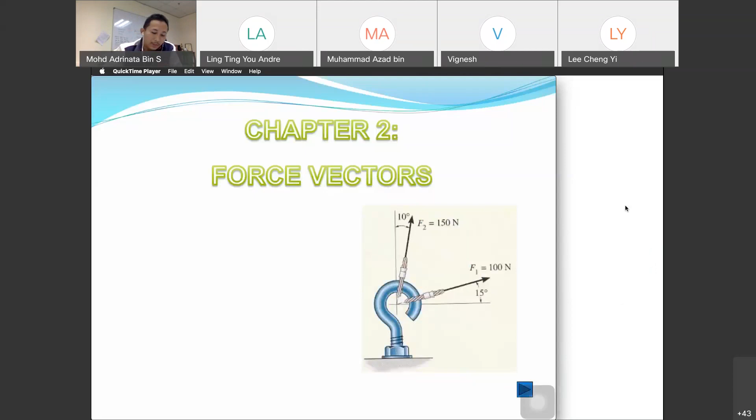Okay, so class, we have discussed our chapter 3 in our previous class. This is chapter 2. Okay, so, wrong chapter. We have discussed our chapter 3. This is chapter 3, Force System Resultants. Okay, this is about moment. So we have discussed about the moment, and it is about moments, which is force times the distance.

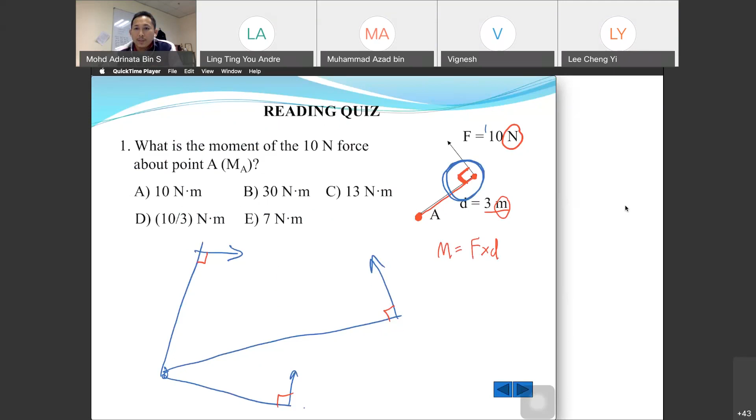Okay, so in this chapter we will learn about the couple moment, and the equivalent system of forces and moments, and also the resultant force and the couple system for force and moment. Okay, so we have learned, and I have drawn you the moment, how to determine, how to calculate your moment. It is from F, force, load given, and also the distance from the load to the point that you want to look at. The application is about the wheel and the lug nut. So it depends on the force, and also it depends on the distance.

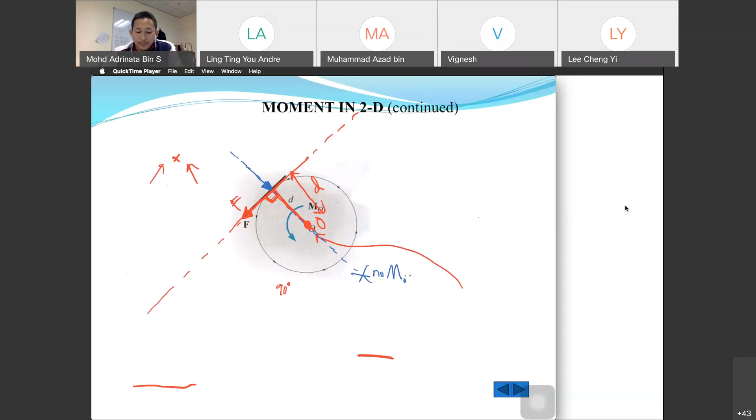Okay, so I have explained an introduction of the moment. So I hope that you have looked back if you do not understand, and I have uploaded the previous class about this one. There is the magnitude, which is perpendicular, and we have direction, and mostly we assume that counterclockwise is positive.

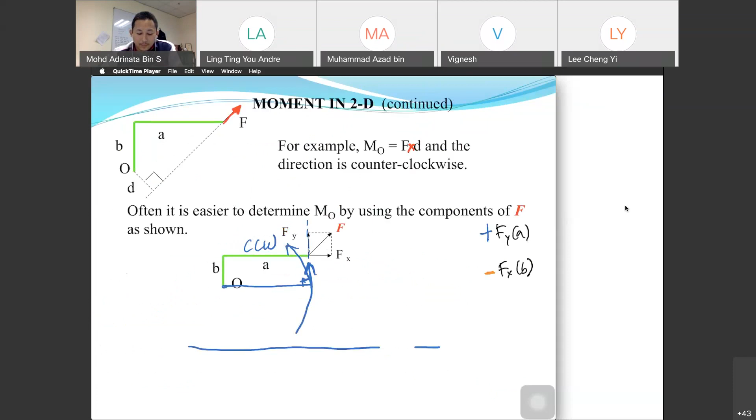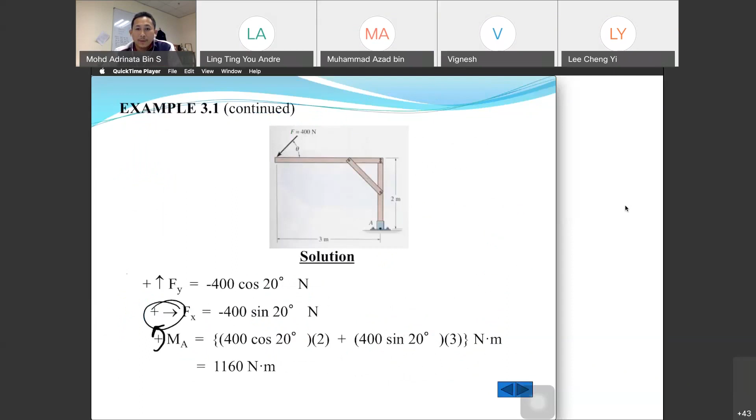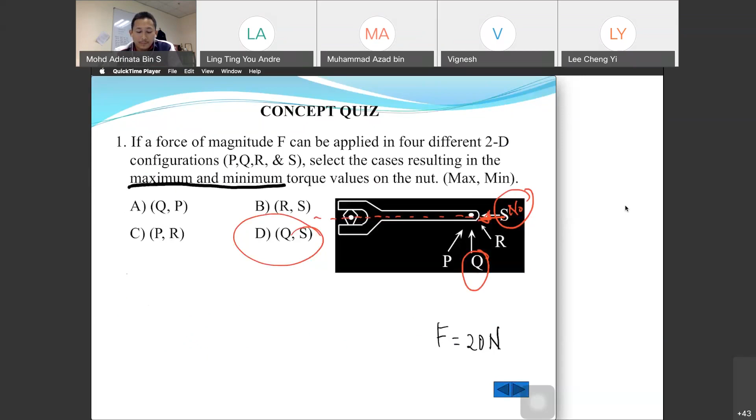Okay, so we have discussed about this one. We have calculated our examples. And this is another example of breaking your force into x and y direction, and then calculating your moment at a point. And we have discussed this one, the maximum and the minimum. And now we are going to discuss about

this question. The question is, given a 40 Newton force is applied to the wrench. So we have a wrench, and the question is, find the moment of the force at O. So where is O? Here is O. We need to find the moment there. So the moment M is equal to F times d. It must be perpendicular, so 90 degrees. So you have 40 Newton, and then you have your point at O.

Okay, so then what you need to do, you need to break your given force at A into X and Y, and then you need to find the distance for X and Y. So for this one, we have 40 Newton, and then we break it into two. The first one is 40 cos 20 degrees, and the other one is 40 sine 20 degrees. So that is the breakdown of the force for 40 Newton.

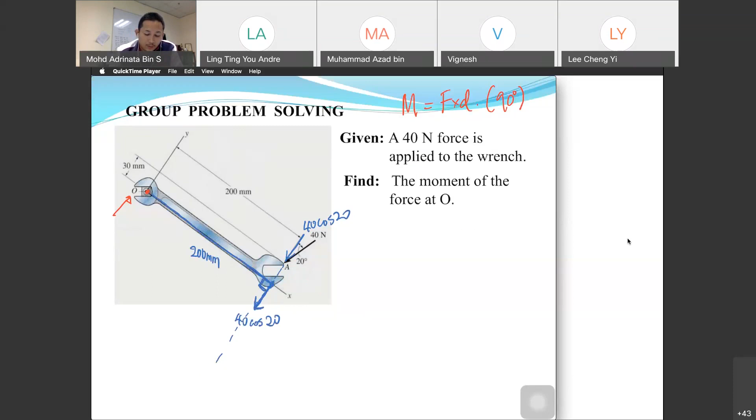Okay, so this is 40 cos 20. Then this is the line. I just put it here. This is 40 cos 20, and this is the line that you should use. The line is 200 mm. Okay, so you put your force here, 40 cos 20, and then you need to find your distance. So which is the distance? The distance is 200 mm.

Next, you have your 40 sine 20, and obviously it is 30 mm. Okay, so this is the line of action of our force. And then where is the perpendicular line? So we find that this is the perpendicular line of our line of action for our force, and then this is our force, 40 sine 20 degrees. So that is our distance. Distance is 30 mm.

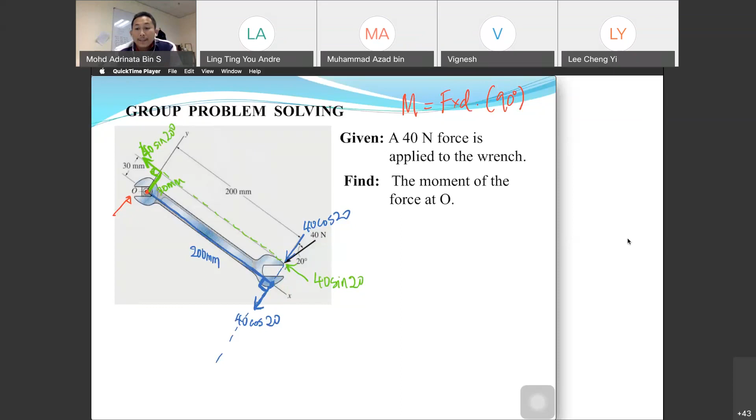Okay, so that is how we define our distance. So it needs to be perpendicular. So this is

Every semester someone will pick the wrong distance. Okay, so that is why I need you to understand carefully and jot down your answer very carefully so that the distance is correct. Okay, you write your... okay. Okay, so that is our distance.

So the moment at O. We have settled our x and y force axes, and then we need to determine the moment at O. So we take the moment at O here, and then we have our first force and our second force. Okay, so summation of moment at O, we assume that counterclockwise is positive. Moment at O is equal to, the first one we have

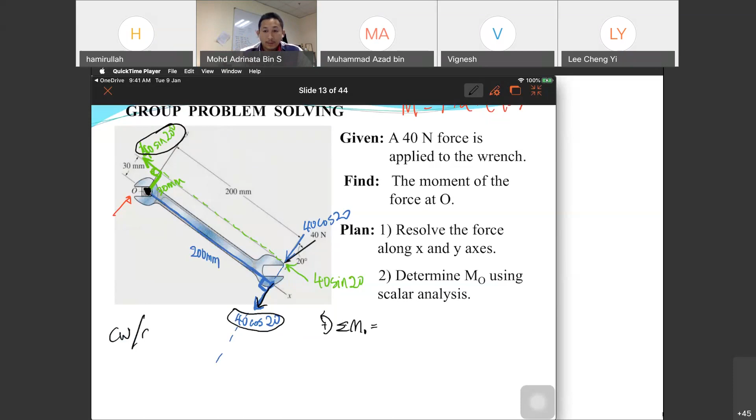40 cos 20. So from point O, we look at the 40 cos 20, the first force, and will it act clockwise or counterclockwise from point O? Clockwise or counterclockwise? Clockwise. Okay, so thank you for the answer. Yes, it is clockwise direction. So you pin your point at O, and then you look at your force. So 40 cos 20 will make it clockwise direction. If clockwise direction, you can use negative 40 cos 20.

Then don't forget to put your distance, 200 mm. Okay, 0.2 meter. So this is F, this is D. F1, D1. And then you look at your second force, which is 40 sine 20. Okay, so if you pin your point O, the force will act.

Yes, we need to change to meter. I prefer to change it. Actually, it depends on the question, but normally I prefer to change it in the equation, because sometimes you guys forget to change it back. Sometimes after you calculate, then, is it mm or cm or meter? So I prefer to change it the first time you calculate. But sometimes I didn't change it, it depends on the question, but for you guys I prefer you to change it to meter, because when you get your final answer you can change it to tera, kilo, whatsoever, because of your 10 to the power of x.

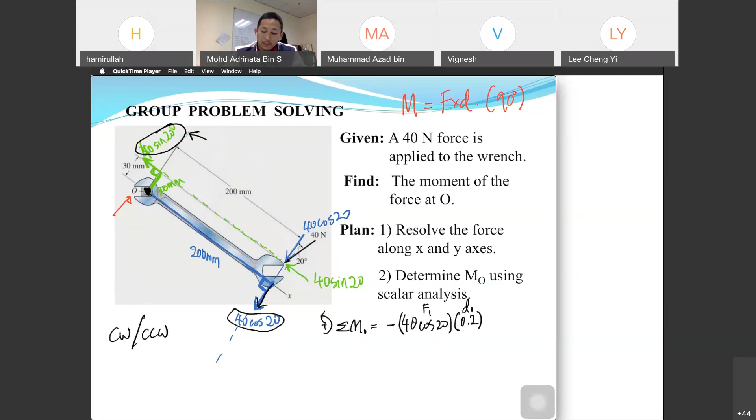Okay, back to our question. So we need to find our 40 sine 20. For 40 sine 20, when we pin at O, it will move counterclockwise. Okay, so counterclockwise positive, we have our positive 40 sine 20. And don't forget your distance. Distance is 0.03. This is F2 and this is D2. So we can calculate our moment.

Okay, so this one, see? In the examples, they did not change it, but they put it there. So actually, you need to know which unit you are using. Then finally, at the final answer, M is 10 to the power of -3, then it changes 1, 2, 3 decimal places: 7.11 Newton meter. Okay, so why is it negative? It is about the direction. So 7.11 Newton meter is in your clockwise direction.

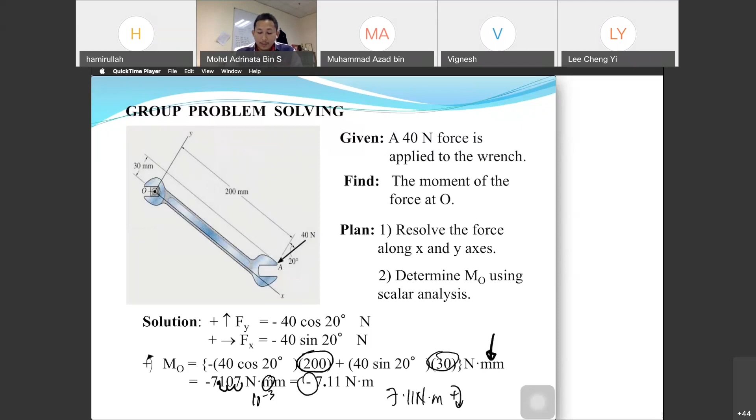Find the moment of the force at A. So for question number 1, you need to find your force. So this is F and this is D. So moment is equal to F times D, 100 Newton times 2 meter. Okay, so we have 200 Newton meter. Next, oh sorry, A is already done.

Okay, question B, 50 Newton, and what is the distance for question B? This is 50 Newton. This is force, and you need to find your D. Which D are you going to use? This is sigma moment at point O. So we have O here, and they are the same. So the answer is 0.75. Thank you for the answer, 0.75.

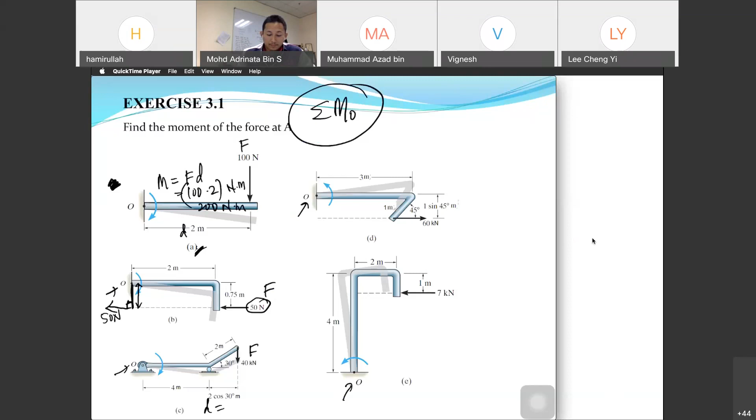Next, C. C is 40 kilonewton. And what is the distance? This is our F. What is your D? D is equal to... okay. What do you need to do? We have our F, 40 kilonewton. What is our D? What is our line of action for the force? And then what is the distance, the line that we draw perpendicular to our force?

4.31. Okay. There are answers: 4.31, 4.3085. Others, what is your answer? Surya Prakash 4.31, Azhari 4.3085, Lee Cheng 5.732. Okay,

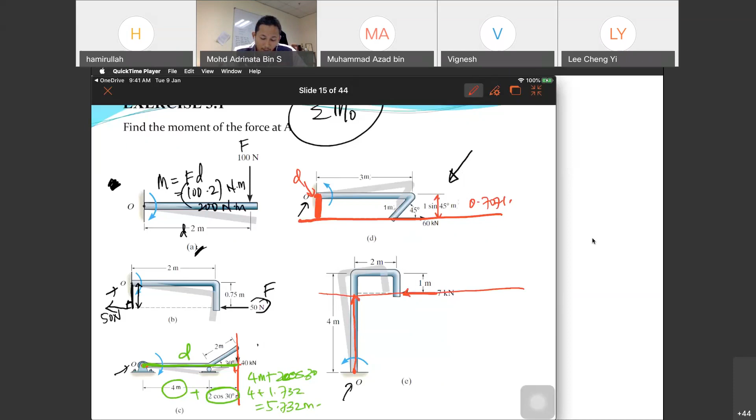Okay, finally we have our 7 kilonewton. What is our distance? Show me your distance from O. So you have O. Okay, you have your line of action here, your force, and then you need to draw from your O perpendicular to your line of action, and this is the distance, equal to 4 minus 1 equals 3 meter. Okay, then you have your moment, 7 times 3 kilonewton meter.

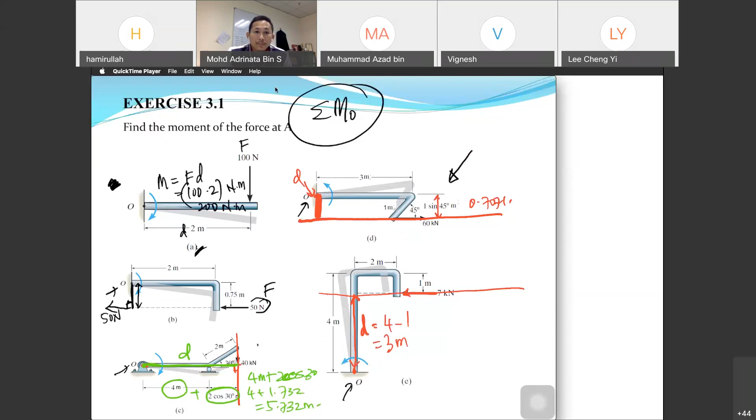Okay, good. That is the simple exercise. And if you don't understand, please do it again and again. Okay. So this is the answer. I just show you how to get your distance, because getting the distance is important. Some still don't see it. So please do it again and again and understand how to get your distance.

Okay. So the tip is action line. Okay, action line of our force, and then perpendicular from the point. So from the point to the action line, that is our distance. Okay.

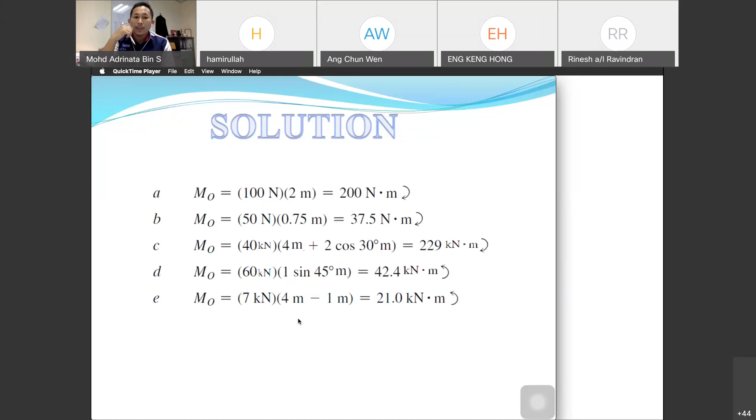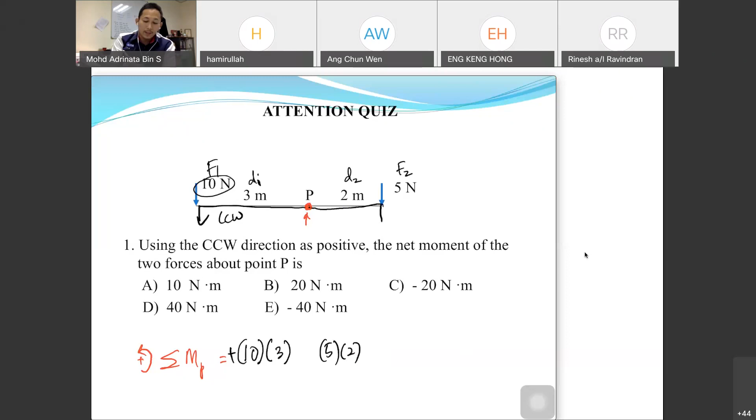Okay. Then we have 5 Newton for F2 and D2 2 meter. And when you fix your P, the 5 Newton will act in the clockwise direction and it is negative. So we have 30 minus 10 equals 20 Newton meter at P. Okay?

Next example. Force F acts at the end of the angle bracket. Determine the moment of the force about point O. So this is what we want to look at. So we have our moment at O equals how much? Okay, moment at O is equal to how much, and then we assume that counterclockwise is positive.

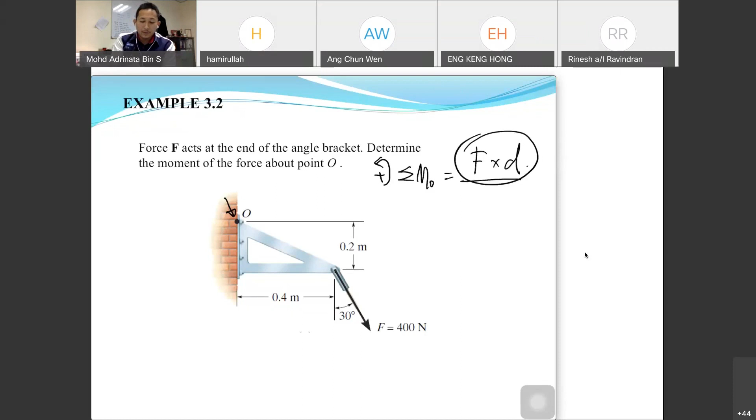Okay, so first of all we need to find our F and also D. So we have F and D, and from the figure we need to break our force into X and Y direction. So for X direction, we have 400 Newton times, what is this?

Okay, so we have 400 Newton cos 30. Then kita ada 400 Newton sin 30.

Okay, ini simple je tau. Okay, nampaknya, okay, baru dah cakap. Nampaknya semua masih tidur, tapi ada seorang yang bangun. Okay, so we have sin 30. So ada yang now tengok je kita dah tahu kat mana kan. Terbalik je, saja je. Okay, maksud dia mata tu masih terbuka lagi lah.

So 400 sin 30 and 400 cos 30. Okay, so next we need to find our D. So for our D, we need to draw our line of action for force. So this is the line of action for our 400 sin 30. This is the line of action. And then from O, we draw the perpendicular line. So this is our distance. Distance is equals to 0.2.

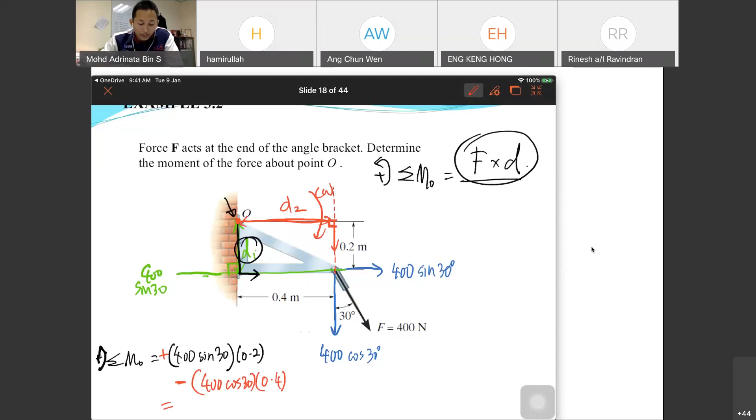So kita dapat calculate kita punya moment at O. So this is our moment at O. We get negative. Okay, negative, and this is clockwise, and positive means counterclockwise direction. Okay.

The Achilles tendon force FT. So FT is mobilized when the man tries to stand on his toes. As this is done, each of his feet is subjected to a reactive force of NT. NT equal, this is NT, okay, 400 Newton. If the resultant moment produced by force Ft and Nt about the ankle joint A is required to be 0. So sigma moment is equals to 0. Moment dekat A equals to 0. Determine the magnitude of Ft.

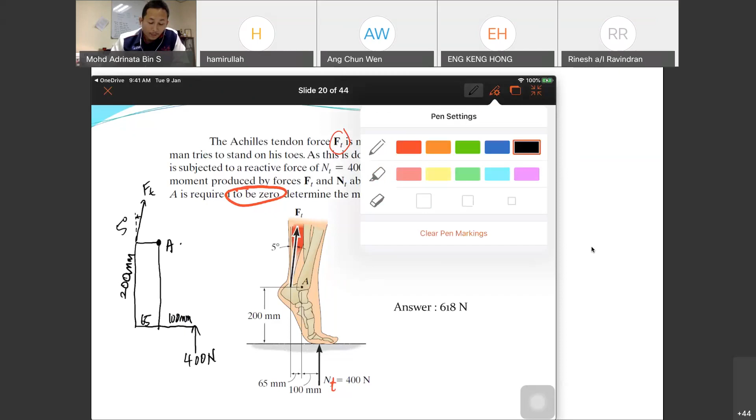If the resultant moment produced by Ft and Nt about the ankle joint A is required to be 0. Okay, so dia cakap dekat A. So this is our A. And then we have our 0.2. Kat sini tulis 200. So this one is 200 mm. This one is 65. This one is 100 mm. Okay, so dekat point A, what do we have? We have our 400 Newton F, line of action, and then we have our D. So this is 400 times 0.1, okay, 100 mm.

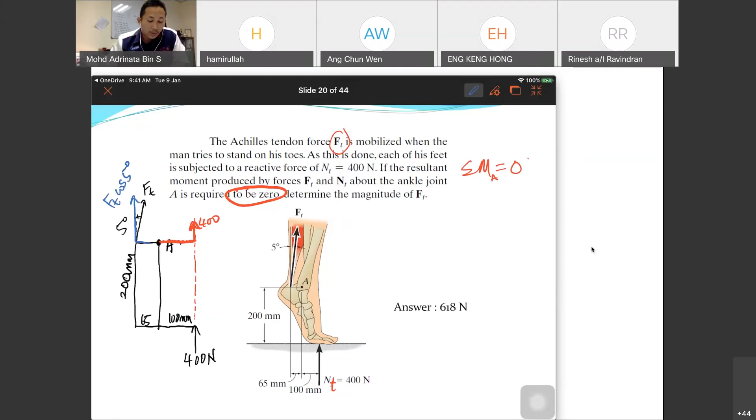Then we have our FT cosine 5. And then we have here this one. So Ft sine 5 is not calculated as moment sebab tak ada distance. This is the line of action. So it touches A for the line of action. So we have sigma moment at A is equals to 0. Okay, so we have positive 400 Newton times the distance 0.1 meter, and then we have another Ft cosine 5 degree times distance 0.065.

Equals to 0. So Ft, if we pin at A, Ft cos 5 will react in clockwise direction. So it is negative. Okay, so we can find our Ft is equals to 400 times 0.1 over 0.065 cos 5. So we have 617.7.

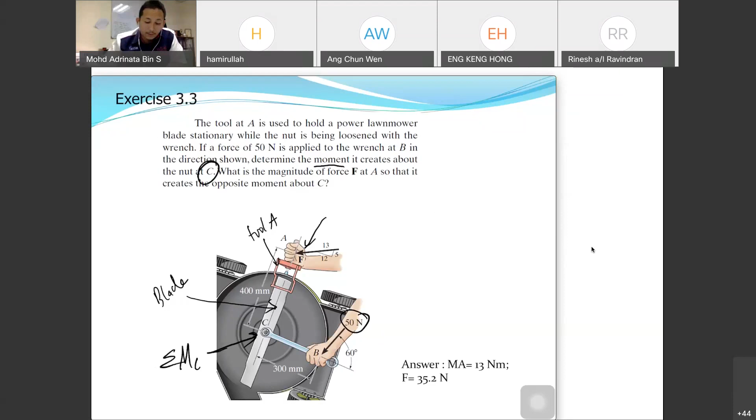So kat C, moment at C. What is the magnitude of force F at A, so that it creates the opposite moment about C? So dia nak tahu F berapa. Creates the opposite moment about C is summation equals to 0 lah.

Yeah. 100 mm is 100 times 10 to the power of negative 3 meter. So we remove the 3: 1, 2, 3. So this is 0.1. Okay, not 0.01. 0.01 is if we have 10 mm. Okay.

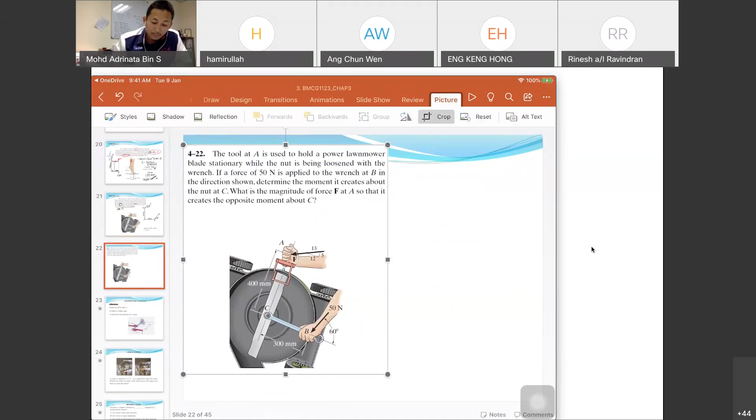So for moment, we calculate at C. Okay, so moment at C is equals to 0. To be safe, you need to draw all of the forces, the broken-down forces. Okay, so this one is 12 over 13 F. And this one is not included at point C, because the line of action is on the line C, but just write it 5/13 F. Okay, then we have next

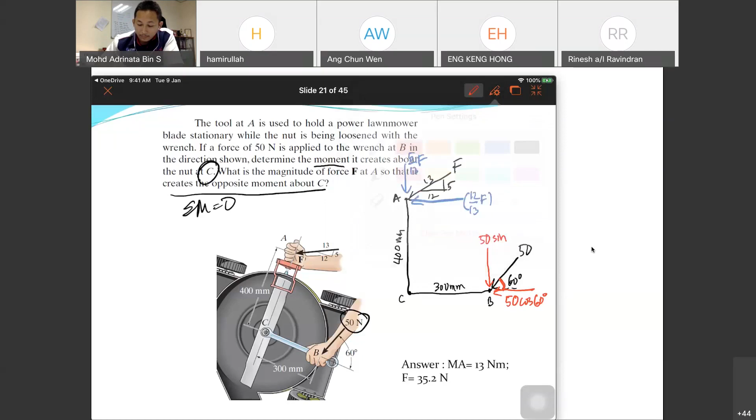50. So the angle that touches this line is cosine. Okay, 50 cos 60, and this one is 50 sine 60. Okay, so for point C, we don't look at this one, and for point C, we don't look at this one, because there's no distance. The line of action of the force is on line C.

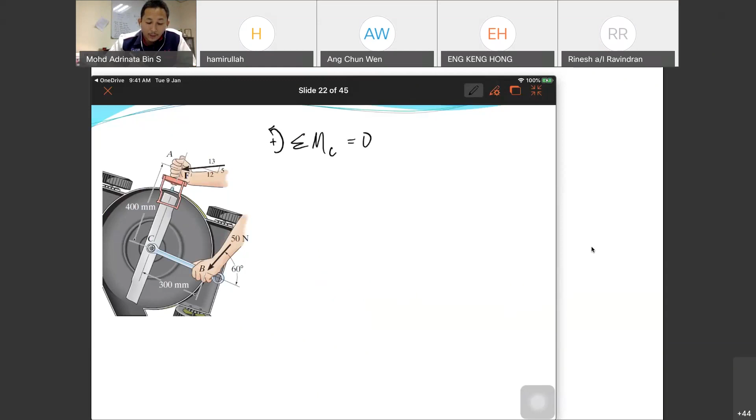So we have our F, and we have our distance. This is the distance for F, and we have our F here, and we have our distance. Okay, so we calculate our moment at C equals to 0. We assume that counterclockwise is positive. Then we have this one, 12/13 F, and we have this one, 50 sine 60. Number 1 and number 2.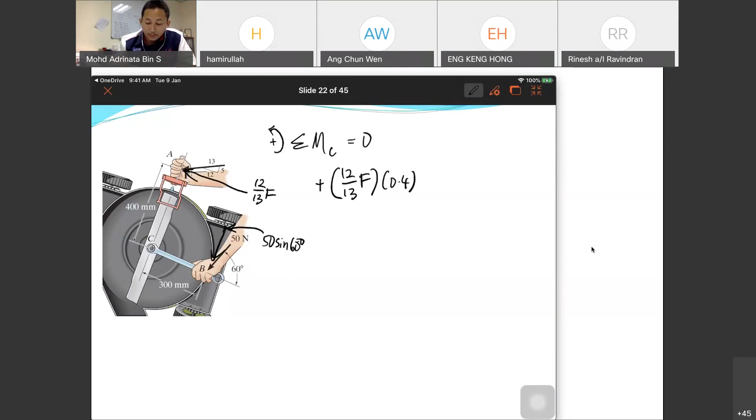So at point C, 12/13 F, and don't forget your distance. Your distance is 400 mm, 0.4. When you fix your C, the force will act counterclockwise, and this is positive. For the second force, we have 50 Newton sine 60 times our distance 0.3. When we pin our C, the force will act in the clockwise direction. It is negative, equals to 0. And solve the problem.

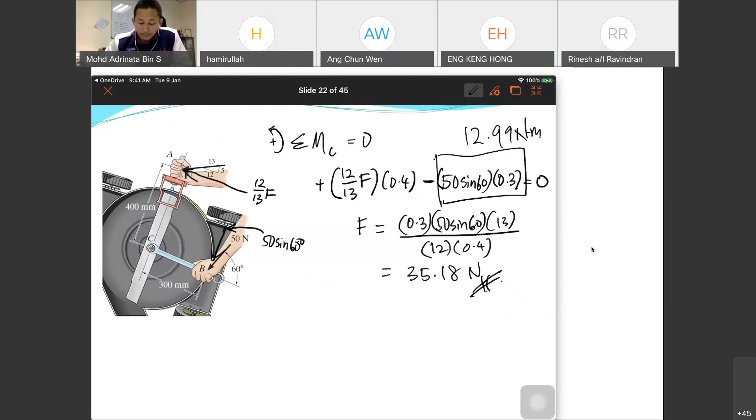You get F equals to 0.3 times 50 sine 60 times 13 divided by 12 times 0.4. F equals to 35.18. Okay, answer, and this one is actually 12.99. Okay. Oh, we did a lot.

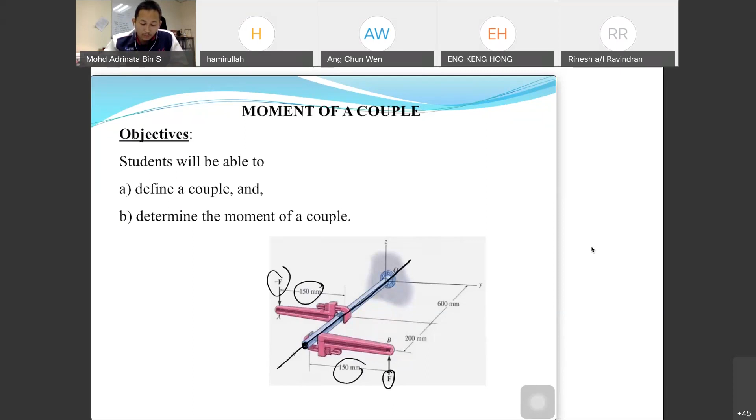Now, we are going to moment of a couple. Moment of a couple is two forces that act with the same magnitude but in the opposite direction. Students will be able to define a couple and determine the moment of a couple. So from the figure, we have F and distance. So this is our point O.

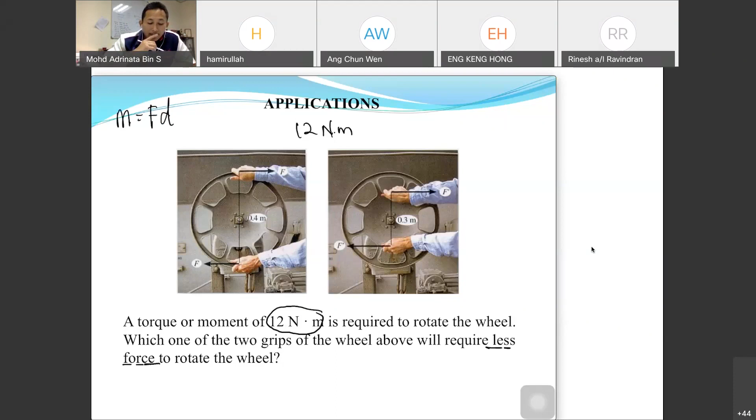A torque or moment of 12 Newton meter is required to rotate the wheel. Which one of the two grips of the wheel will require less force to rotate the wheel? Do you think F or F prime will be less? So we have moment. Moment is equals to F times D. Then we have 12 Newton meter equals F times 0.2 plus, so we assume clockwise is positive.

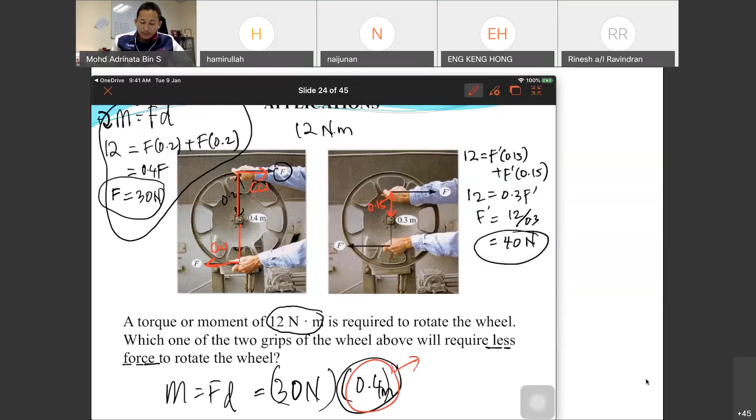Okay, so from that, this one, this is couple, okay? So from dividing by 0.2 each of this one, you just use the same amount of force, and you just use the total length. So it will give you 12 Newton meter.

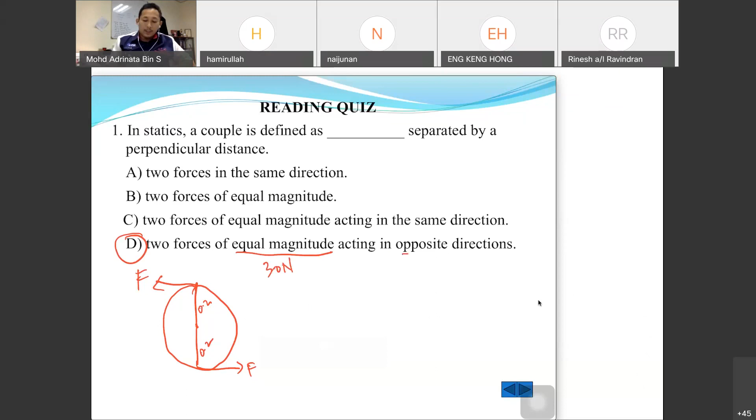Okay, the answer is D. Equal magnitude, same as before, 30 Newton in opposite direction. So one left, one right. Okay, thank you for the answer.

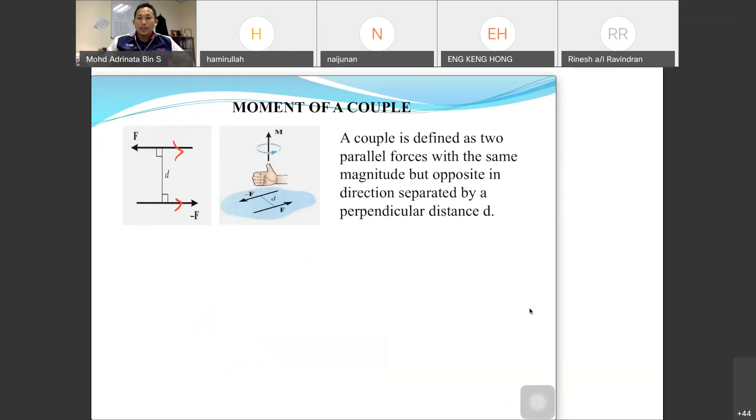So this is moment of a couple. A couple is defined as two parallel forces. So it is parallel, with the same magnitude but opposite in direction, separated by a perpendicular distance. So we use the total distance D.

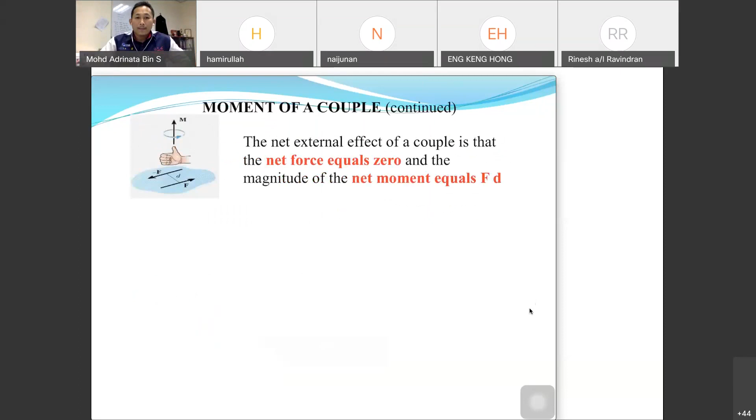The moment of a couple is defined as M equals F times D. The net external effect of a couple is that the net force equals 0 and the magnitude of the net moment equals F times D. So moment equals 0, then moment equals F times D.

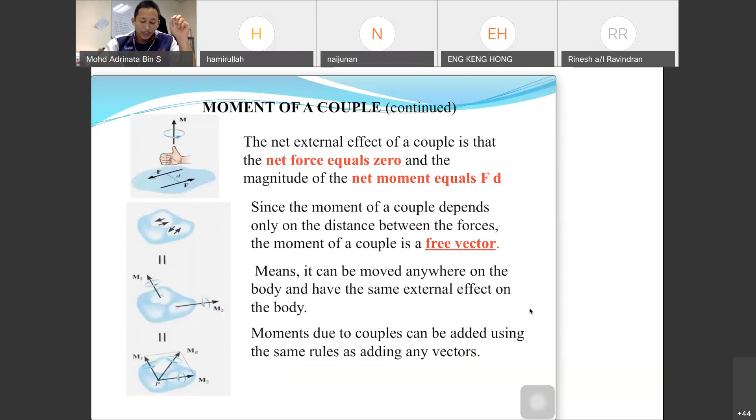Okay, the figure moments can be moved. MR is the resultant moment. Moments due to couples can be added using the same rules as adding any vectors. So it can be added.

Example 3.3. Determine the moment of a couple acting on the member shown in figure above.

Yes, right. So we have 150 kilonewton force, and then we can break it into x and y direction. So we have x and y direction. This one is 3/5 times 150, equals 90 kilonewton. So this one is 90 kilonewton. And this one is 4/5 times 150 equals to 120 kilonewton. So this one is 120 kilonewton on the x direction.

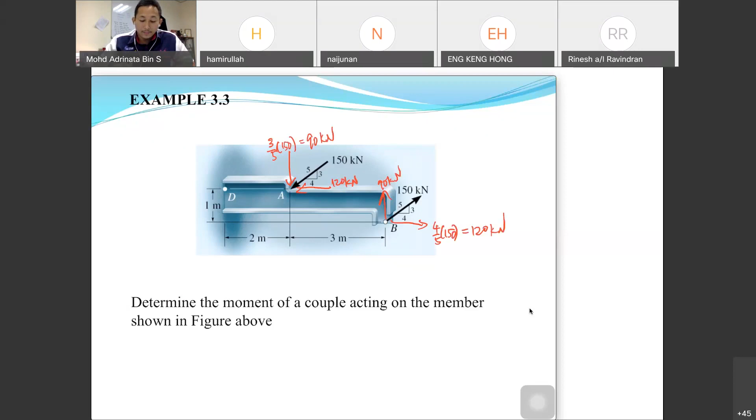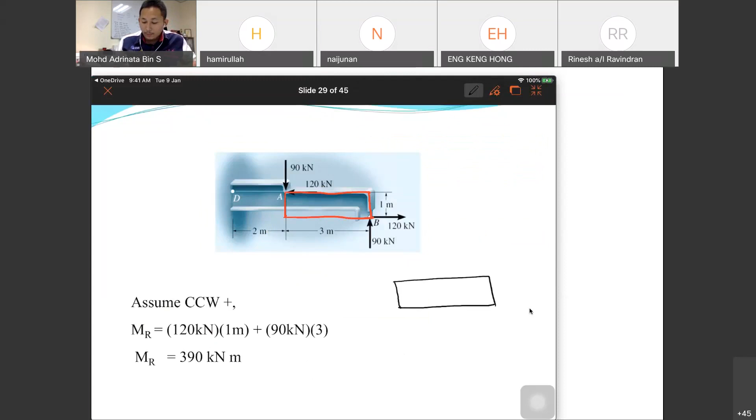So the couple moment, okay, the couple moment of the first one, let's say this area, okay. The square, we take it out, and then we have moment 120. So the distance is, if we run on the center, we have 120 and 120. So this is our distance. Distance is 1 meter. Then next we have 90 kilonewton.

So if we make a line at the center, we have a line here of 90 kilonewton, and this is the couple of 90 kilonewton, and the distance is 3 meter. Okay, so that is our couple moment.

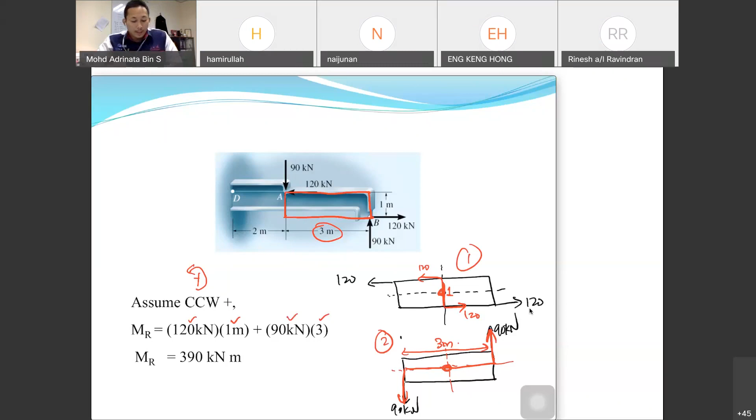We assume that counterclockwise is positive. So for the first one, if we fix at the center line, we can calculate 120 kilonewton times D, which is 120 times 1 meter counterclockwise. And then the second one, 90 kilonewton times 3 here is also counterclockwise. So both are positive. That's the calculation of our couple moment.

Determine the resultant couple moment of the three couples acting on the plate. Okay, so couple moment. So it's already given F1, F1, F2, F2, F3, F3, already noted there. So we look at F1 first.

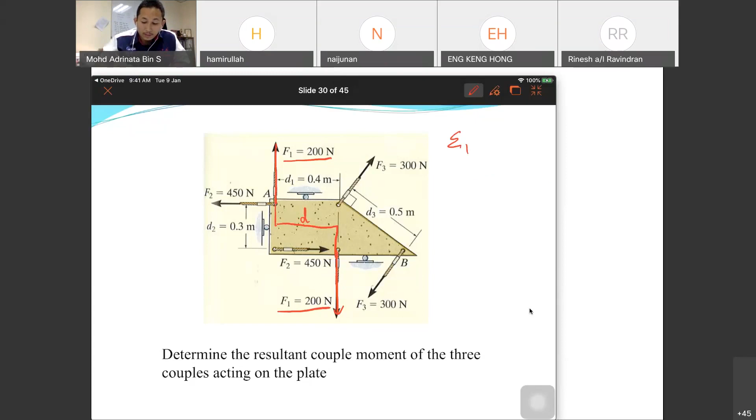F1, F1. Moment for one. This is our moment, and then the distance, D. Moment one is equals to, so we assume counterclockwise positive, but if we put at D, it is clockwise direction. So it will be negative 200 Newton times 0.4 meter. Okay, so that one is F1.

F2, F2. So F2 moment at 2 is equals to, we have 450 Newton. If we fix at this one, it will move counterclockwise direction with the distance of, so this is positive, the distance of 0.3.

And the last one, final one, we have F3, 300. Counterclockwise positive moment F3 is equals to, if you fix here, it will move clockwise direction, so it will be negative 300 times 0.5. So the total moment is negative 200 times 0.4, positive counterclockwise 450 times 0.3, and negative clockwise direction 300 times 0.5. So we got the answer negative. Negative is in clockwise direction. So the answer is 95 Newton meter clockwise direction.

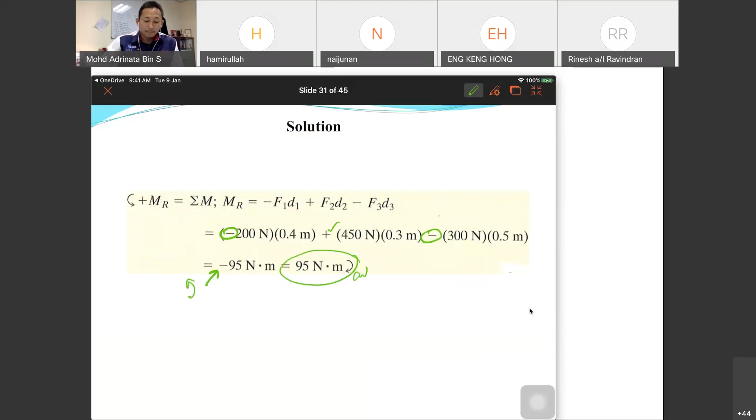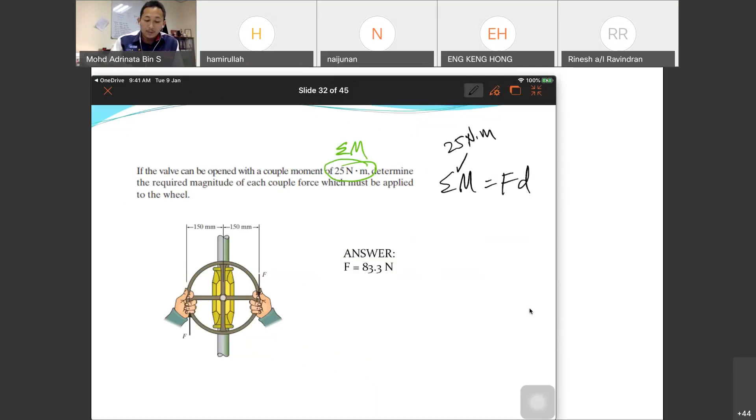The magnitude of the couple, so F equals what? D, what is our D? Okay, so we have F, F, F, we have 0.15, 0.15. Okay, so can you get 83.3 Newton? Okay, use your calculator. Simple question.

So guys, our D is... oh, wrong. So we have 25 Newton meter equals F times 0.3, F equals... okay, now I need to do this one.

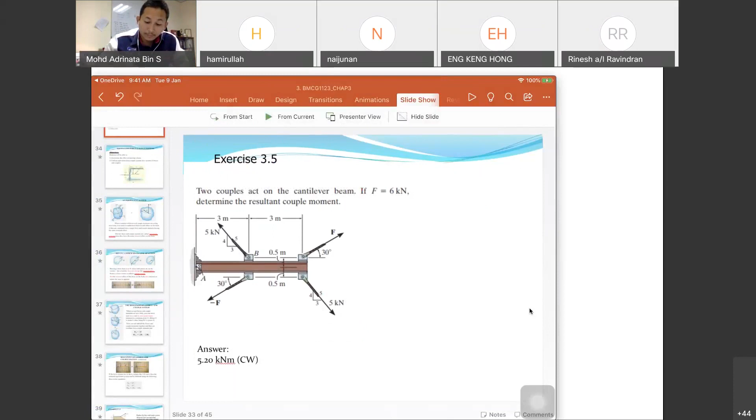Okay, so what did you need to do? You need to find your moment. Okay, right, so you have F equals 6 kilonewton, then you have this one. So you can separate your force: 4/5 times 5 gives 4 kilonewton, 3 kilonewton. This one is 3 kilonewton, 4 kilonewton.

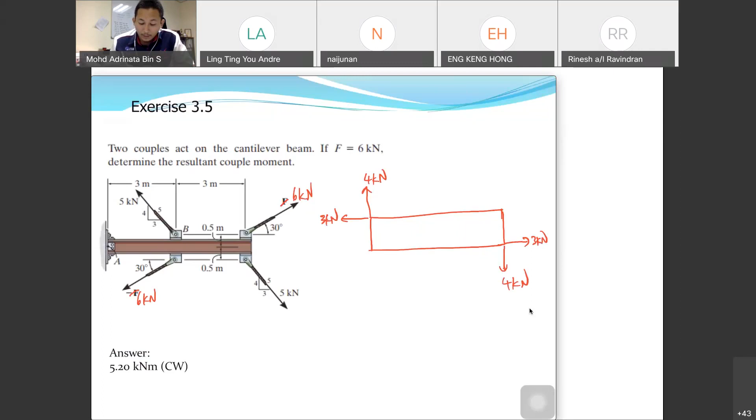Then you have another one here is 6 kilonewton. So you have 6 sine 30, 6 cos 30, 6 sine 30, 6 cos.

Oh, 3 kilonewton. You have a triangle, okay? And you have this one, 5 kilonewton. Just use the proportion of the triangle to get it using x and y direction. So you have here 4, 3, 5 - this is the triangle, and the value of your force is 5 kilonewton. So just use the triangle to get this one is 3 kilonewton, this one is 4 kilonewton.

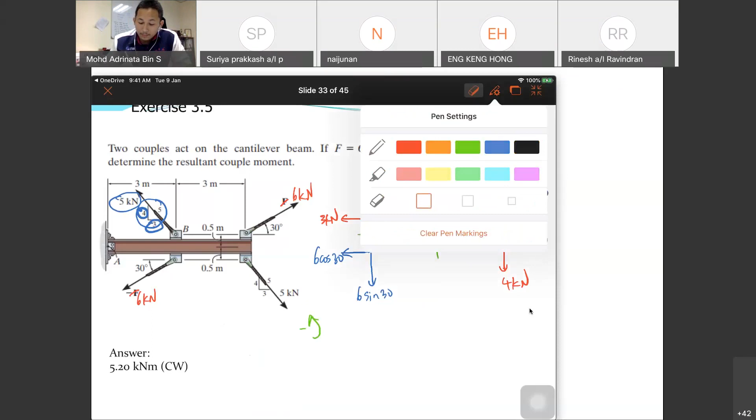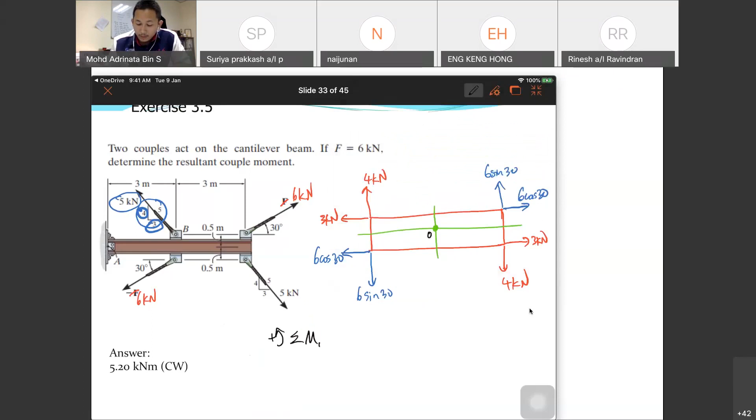Okay, okay, so for the moment, okay, so for the moment 3, 4, 6 cosine. Okay, so a moment counterclockwise direction. So for the summation of moment counterclockwise direction at O equals, we take this one first. I will take the moment couple of this one first. Okay, so this one first.

So we have 6 cos 30, and if you fix at O, it will move clockwise direction. Okay, so it will move clockwise direction. So it will be negative 6 cos 30 times the distance. What is the distance? Okay, the distance - I move it here, and this is our couple. Okay, this is the distance. Distance is 0.5 plus 0.5, so it is 1 meter.

Next, number 2 is 6 sine 30. So if we fix point at O, it will move - this one is counterclockwise direction. So it is positive 6 sine 30 degrees times the distance. The distance is this one. Okay, so this is the distance. The distance is 3 meters.

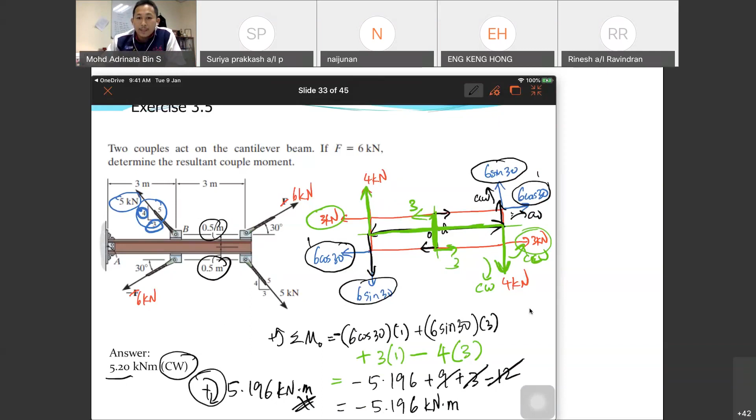Okay, clockwise direction. It is either you put clockwise this term or you put the arrow. But if you didn't put it, one mark will be deducted. Direction of your mark, I don't know the direction of your answer.

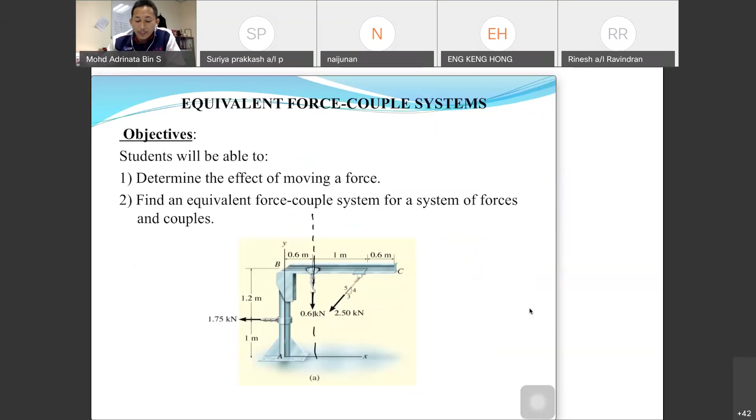Move your force. Before this, I taught you that it will work on its line, it cannot be moved. But in this chapter, you will learn how to move your force. So if this one is 0.6 kilonewton, you want to move it here, 0.6, you can move it, but it will add another force, which is what we call moment. So you can move the same magnitude of force F, and then it will have an additional force, which is moment.

When a number of forces and couple moments are acting on a body, it is easier to understand their overall effect on the body if they are combined into a single force and couple moment having the same external effect. So we want only one F and one moment, only one value, so that we can determine what will happen to our body. The two force and couple system are called equivalent systems since they have the same external effect on the body. So it is equivalent.

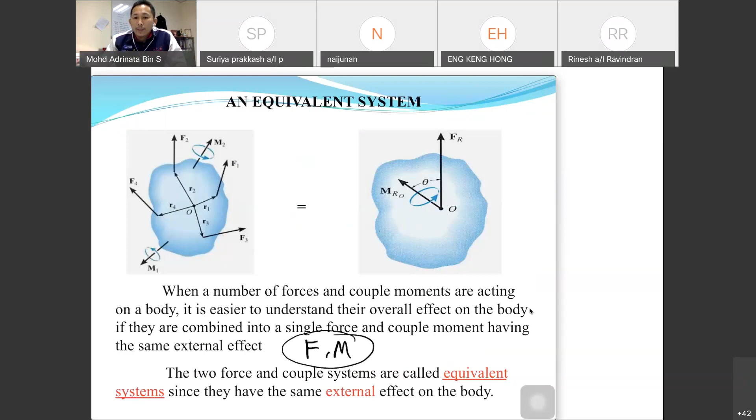Before this, from our previous chapter, we tried to calculate our resultant force for Fx and Fy, and theta. So it is the same for the moment, we want to find our equivalent system.

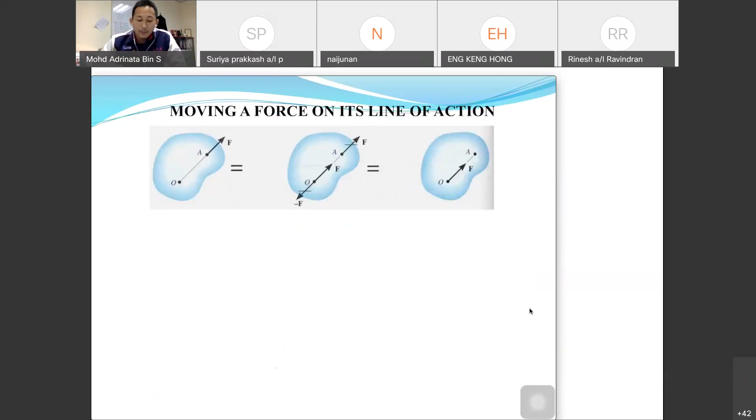Moving a force on its line of action. So moving a force from A to O, when both points are on the vector's line of action, does not change the external effect. From the calculation of the moment, we can move along the line of action. Hence, a force vector is called a sliding vector, so we can move it.

But the internal effect of the force on the body does depend on where the force is applied. So if you push your hand here, you will feel the force here. And if you pull it here, you will feel the force here. It is the effect on the body of where the force is applied. So it depends on where the force is applied.

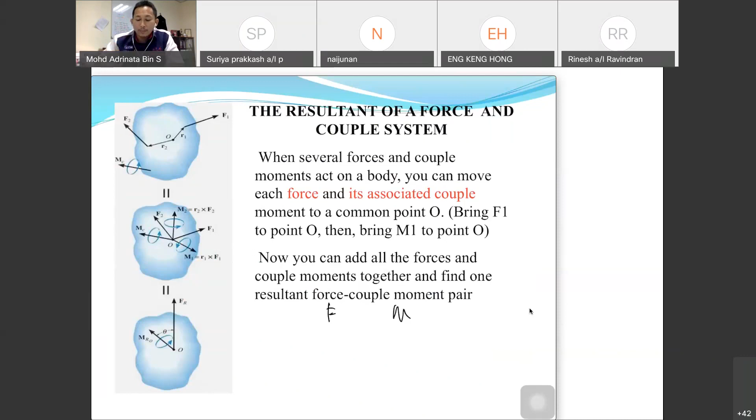Now you can add all the forces and couple moments together and find one resultant force couple moment pair. So we have a force and couple moment, this is the resultant force couple moment pair. So we have one force, we have one moment.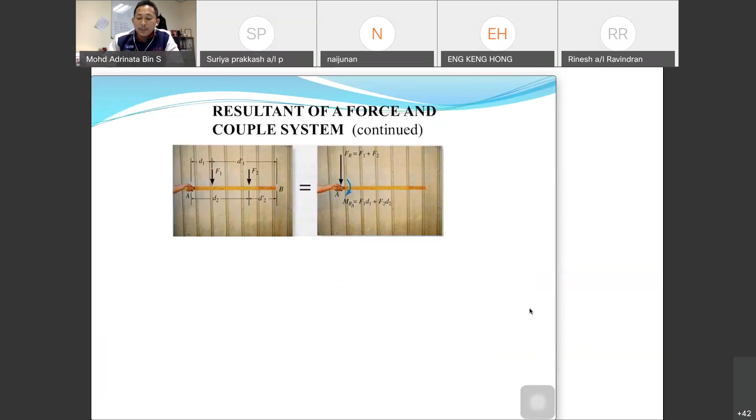Resultant of a force and couple system. You know that M is equal to F times D. If the force system lies in the XY plane, then the reduced equivalent system can be obtained using the following three scalar equations, so we have X, Y, and additional M. From this one, it is equivalent to this one. From the figure, it is equivalent from F1, F1 times D1. You can move this one which is F1, but you have to add another moment, so you have M1 equals to F1 D1.

And then for F2, you want to move here, so you have F2. Both F1 and F2 you put at point A. You can move F2, but you have an additional moment F2 D2. So the total, you still have your force, the same force, the total force when you move, so the magnitude is the same. But you have to add another moment, so the moment is the total of F1 D1 plus F2 D2.

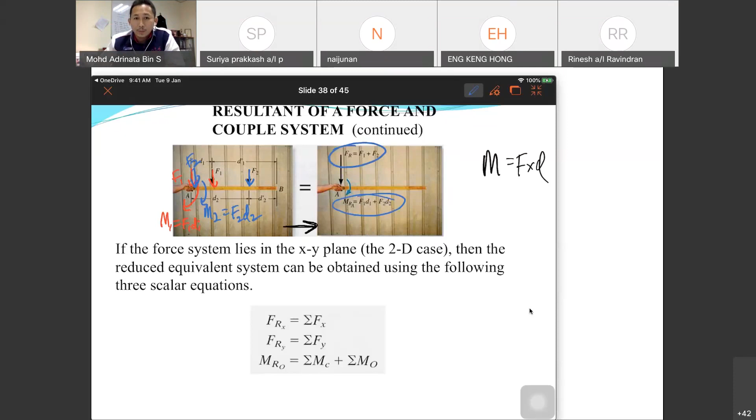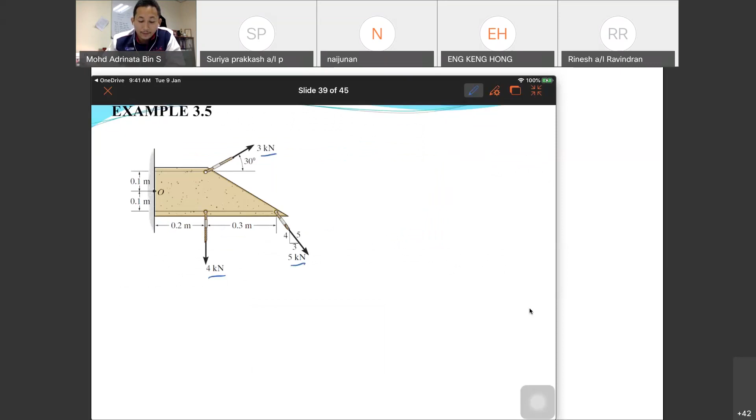Example 3.5. Okay, so we have 3 kilonewton, 3 kilonewton, 5 kilonewton, 4 kilonewton. So 3, 4, 5. Okay, replace the force and couple system shown in figure by an equivalent resultant force. So we want to know the resultant force and couple moment acting at point O. So we want to know it here. This is our point. So what do we need to do?

Actually we will separate or break it into X and Y direction to get our M equals F times D. So this one must be 90 degrees. So to make the work easier, you need to find your perpendicular distance, D. Okay. So resolve all forces into X and Y, sum all forces, so we have Fx and Fy. Then from Fx, Fy, we have the resultant force. And then theta. And then sum all moments.

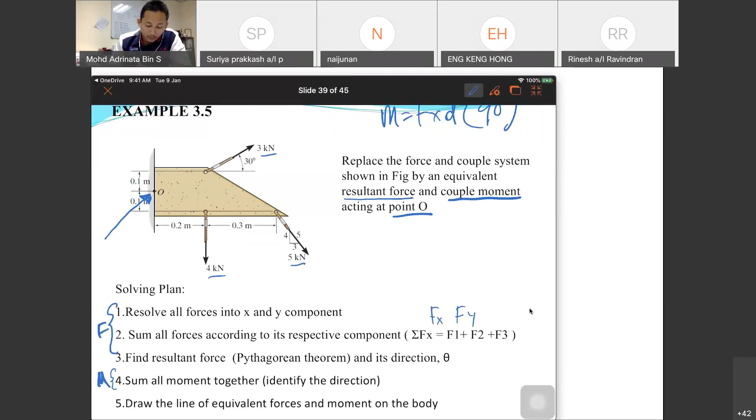So this one is force, and this one is moment. And this one is F and moment. Okay. This is how we're going to get it. So we break, let's see our 3 kilonewton, 3 kilonewton first. Okay, so we have our x direction, 3 kilonewton cos 30, 3 kilonewton sin 30 for y direction, and then the 4 kilonewton is in y direction. Then x direction we have 3 over 5 kilonewton and 4 over 5 kilonewton in y direction.

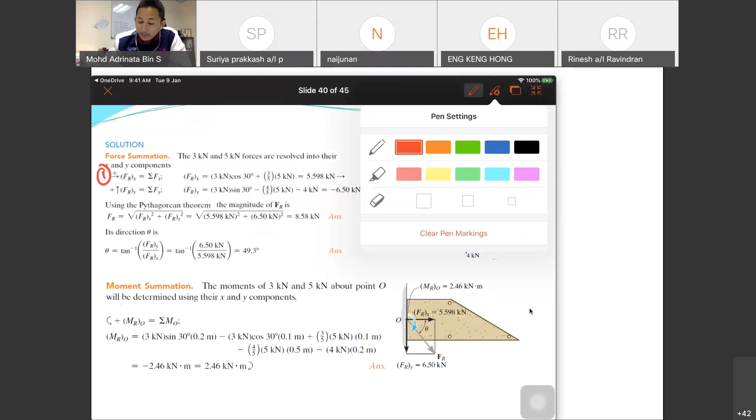So for x direction, we just add this x direction and this x direction. Okay, so 3 kilonewton cos 30, 3 over 5 kilonewton. So the force is acting to the right. Okay, and then Fy. So this one is y, y, and y direction. We assume going up is positive, and then we have 3 kilonewton sine 30 minus. So this one is minus going down, and this one also minus. Okay, so we have minus, minus, and negative means the resultant force is going down.

So we have 5.598 kilonewton, 6.5 kilonewton. So same with our second chapter, resultant force. We calculate the resultant force using Pythagorean theorem, and then we find our theta. Okay, this is the theta. And then moment summation. The moments of 3 kilonewton and 5 kilonewton about point O will be determined using their x and y components.

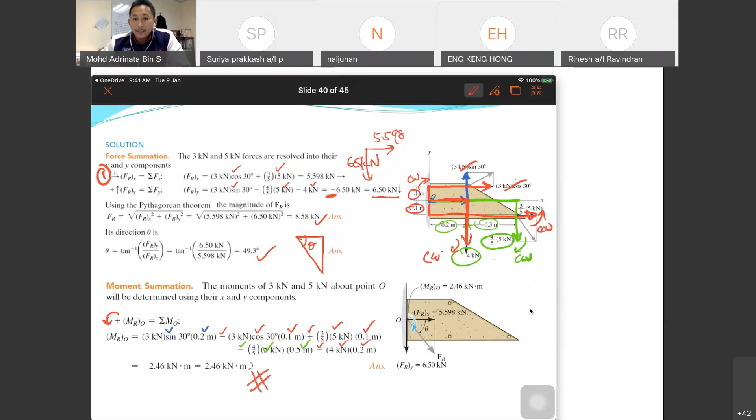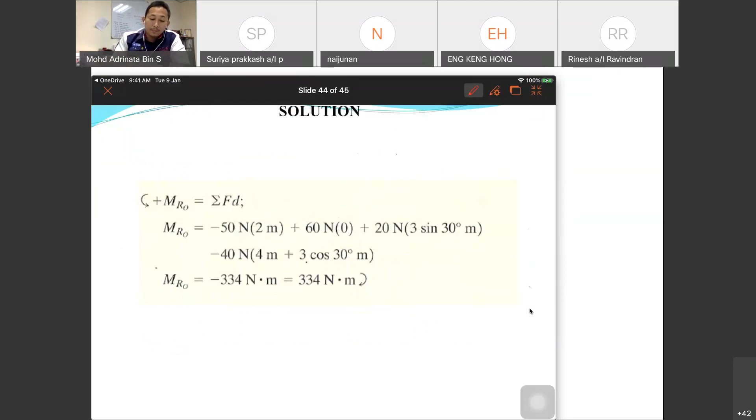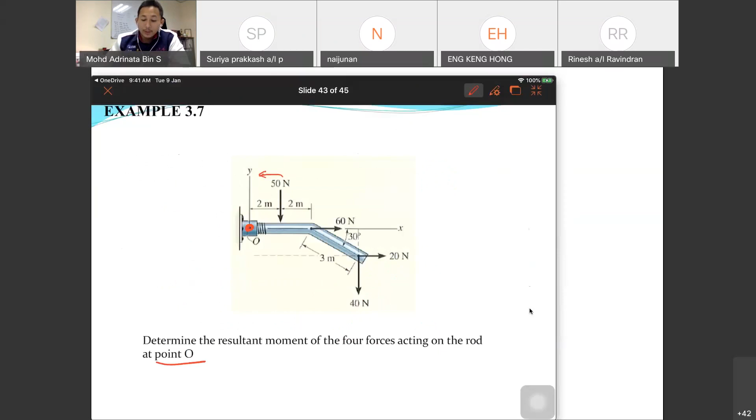So this is another example that you can have a look at. There are another two examples that you can look at and understand. And it is actually how do you define the point? Point A, here, and then you separate your F and move it to point A. So this one is also the same at point O. So you fix your point O and calculate your couple moment at point O. Okay, so that's all for now.